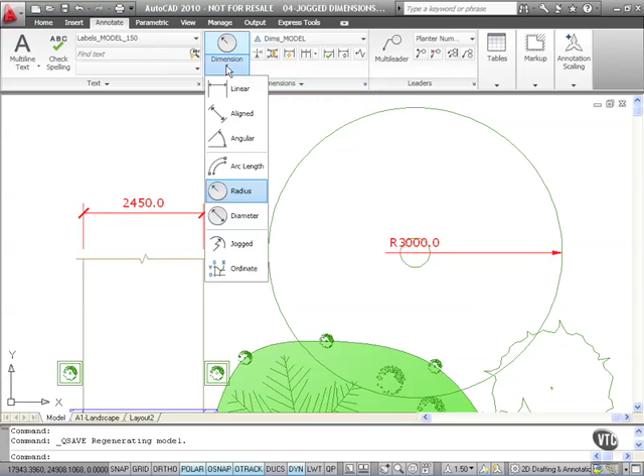Okay, let's have a look now at jogged dimensions. You'll be pleased to know that in AutoCAD 2010, when we go to the Annotate tab and look at our Dimensions panel, we do actually have a jogged radius now coming off of the ribbon. It wasn't available in AutoCAD 2009 on the ribbon. So let's have a look at the jogged radius first.

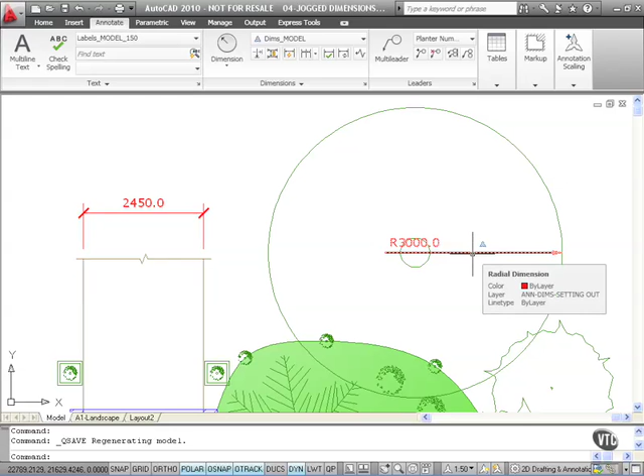I'll just hit Escape there. We've got a normal radius here. That's a standard radius dimension there. And as you can see, if I hover over it, it tells me it's a radial dimension. Doesn't look very neat and tidy, does it? That's primarily because it's a very large radius. It's actually 3 meters. I'm going to delete that one there. And what I'm going to do is place a jogged radius instead.

So if I now click on the down arrow here, as you can see, dimensions, I select jogged, that one there. Prompts me to select the arc or circle. So I'm going to click on the circle that forms the tree there. And it asks me for what they call a center location override. Now I don't want the center here. I want it in here somewhere so that my jogged radius starts here and then touches the edge of the circle. So if I click there, you'll see now, look, there's my jogged radius.

So what I need to do is tidy this up. I'm going to move it so that I get my jogged radius about there. And then I can move the jog. Can you see that? So the jog there is in the dimension style and it's at 45 degrees. So I'm going to click there. Now the only failing of the jogged radius is where the radius goes, the actual dimension.

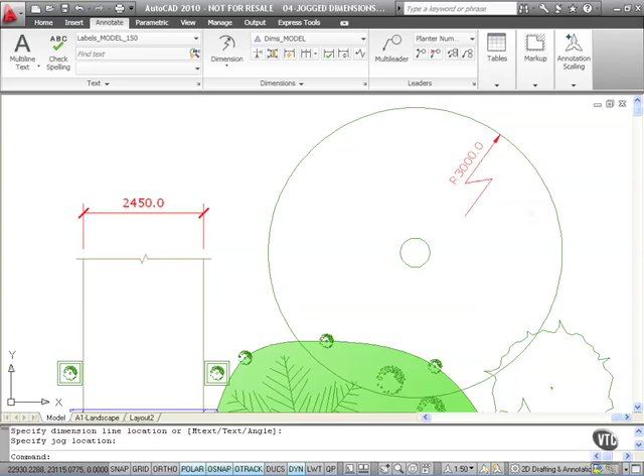So what I can do there, I can click on here, right click, dim text position, and what I need to do there is hover and on that submenu select move text alone. That allows me to move that to the end or drop it here. I'm going to place it on the end like that. As you can see, that looks much neater now.

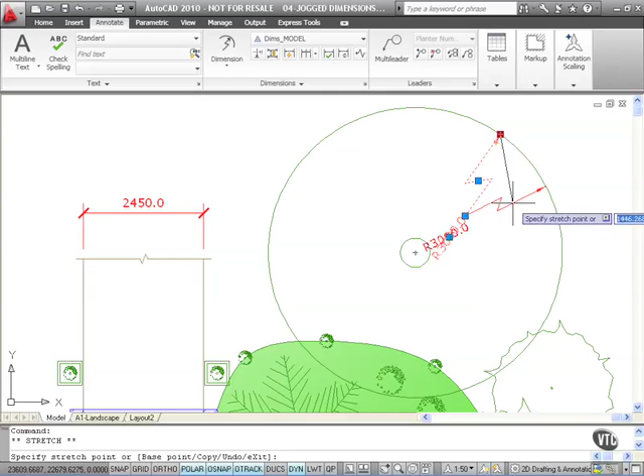If I click here and then click on the end of that as well, look, as I move it now, can you see it stays where I've positioned it as well? It's very useful, that, because obviously you can see there that the 3000 follows the setting that I've set. I don't want to change that position, so I'm going to hit Escape. So that's my jogged radius.

What about my jogged linear? Let's have a look now here. I look at jogged here again. Have I got a jogged linear there? No, I haven't. So what I do is I go up here onto the panel. Have I got jogged linear anywhere here? Moving along now. And as I work towards the end, what's this one here? Adds or removes a jog line on a linear or aligned dimension.

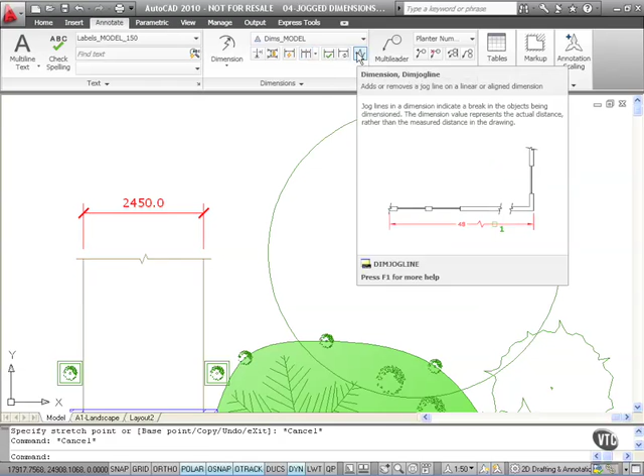So if I click there and come into the drawing area, there's the dimension. I click on it, specify the jog location. I'm going to say the middle of the dimension line there, the midpoint snap, and there's my jog. Now you'll notice the size of the jog is specified in the dimension style itself. If I just go to modify there a second and go to symbols and arrows, there's my jog angle, 45 degrees. There's my linear jog height factor, 1.5 times the text height in the dimension style.

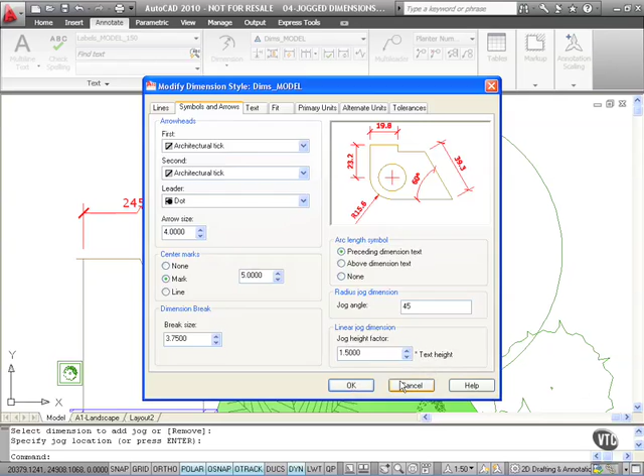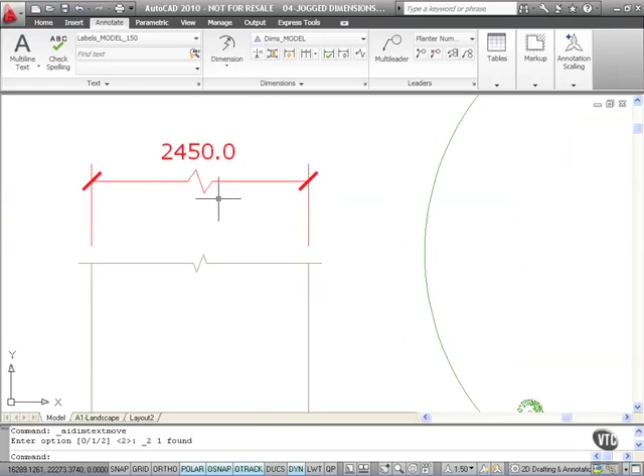Now because of that, I'll just close those. My jog there is sitting just a little bit on the text there. If I zoom in a bit, you can see it's just touching on that 5 there. So again, what I can do, select the dimension, right click, dim text position, move text alone, and I can just move that up slightly and left click. And as you can see, much neater, much tidier. That jog now matches the jog here, so it looks neat and tidy and consistent.

So as you can see, jog dimensions, again, useful. Makes you more efficient, makes your drawings look more professional, and it just allows you to be more flexible with how you dimension your drawings.